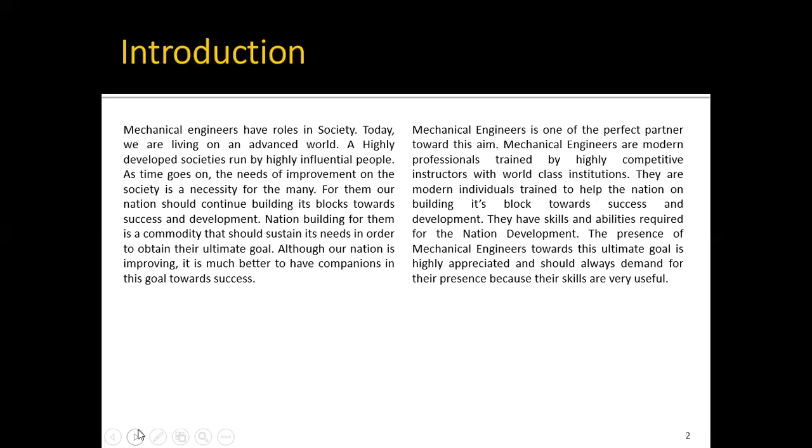Mechanical engineering, a broad profession. Mechanical engineering covers heat and energy. Mechanical engineering covers transportation, automotive. Letter C, mechanical engineering covers machines. D, mechanical engineering covers mechanical designing. E, mechanical engineering covers main industrial plant manufacturing.

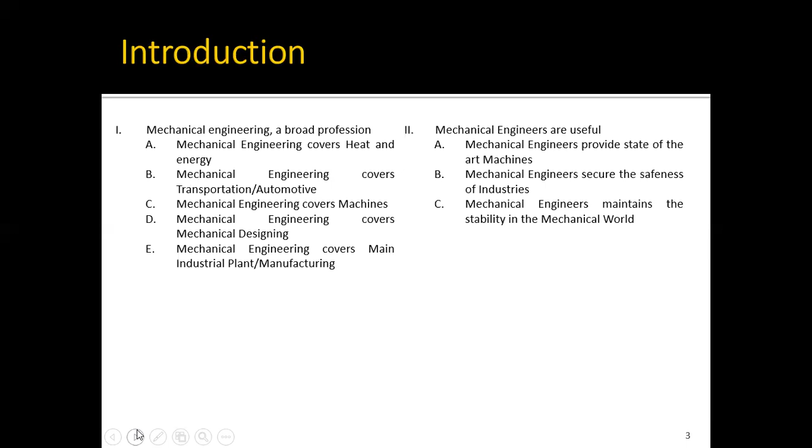Then, mechanical engineers are useful. A, mechanical engineers provide state-of-the-art machines. B, mechanical engineers secure the safeness of industries. C, mechanical engineers maintain the stability in the mechanical world.

So, mechanical engineering, a broad profession. Mechanical engineers are professionals who graduated with a degree of Bachelor of Science in Mechanical Engineering and passed the licensure examination organized by the Professional Regulation Commission of a certain nation.

Some of it is very useful and necessary in improving the level of development of a certain nation. Some of the factors covered by mechanical engineers are heat and energy, transportation, automotive, machines, mechanical designs, and industrial plants. These are only a few of the fields covered by mechanical engineers that can possibly help in nation building.

Okay, na doble. As you continue reading, you will be reading different fields of mechanical engineers that is required in nation building. As we continue, okay?

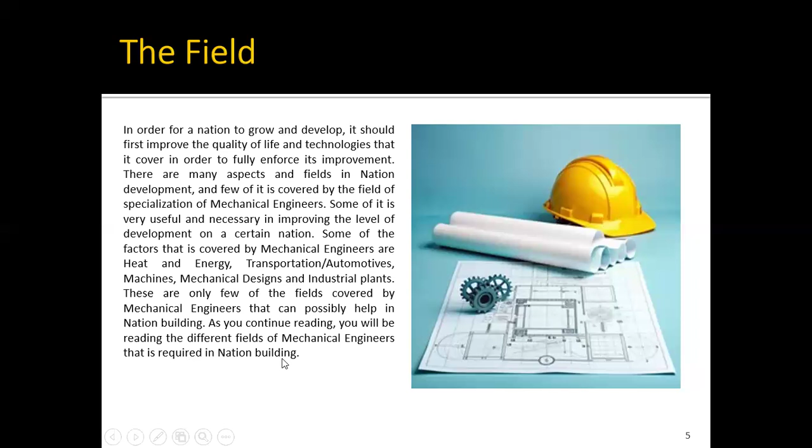For the heat and energy: we have heat and energy as the primary sources of life in the industrial world. Without it, major industries would be paralyzed, thus bringing much pain in the country, for major industries will close and many people will be jobless.

The importance of heat and energy in the nation is very necessary, even though it does not directly sustain the life of the nation. So it is really important that someone would manage and maintain the stability of heat and energy. The presence of heat and energy is surely very useful, so mechanical engineers do the job in maintaining and improving the quality of the heat and energy system in the country.

Mechanical engineers are professionally trained to design and produce machines regarding the production and different ways of producing energy. The presence of mechanical engineers in energy stability is really important, that is why many mechanical engineers are in demand in different energy production companies.

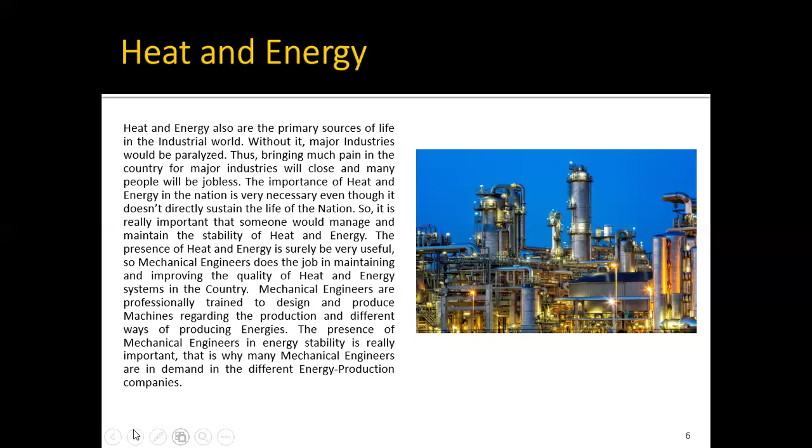For the transportation: transportation is truly helpful in our everyday lives, for it's one of the basic requirements in order to attain our individual goals. Transportation also made our lives easier. It can also save our energy and time, for it can instantly transfer certain things to a certain place without applying too much effort and time.

Transportation plays also an important role in nation building. It can be seen in different angles: it can speed up and hasten the speed of industries, and it can deliver goods to a certain place in just a short period of time. With the advantages of transportation, we can really say that it is very important in our ultimate goal of success in our country.

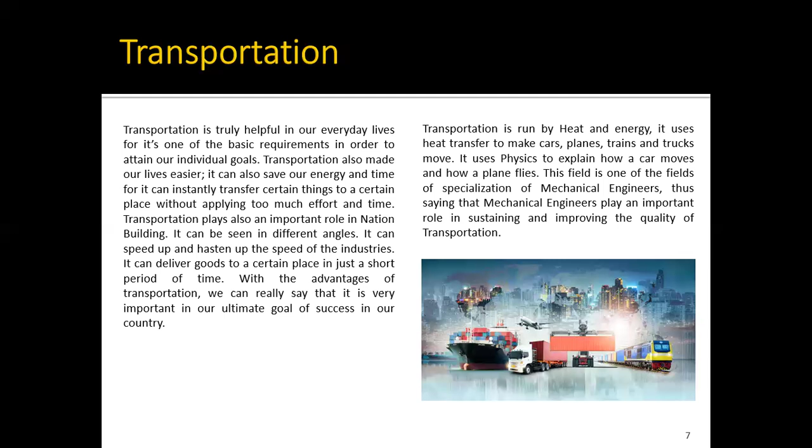Transportation is run by heat and energy. It uses heat transfer to make cars, planes, trains, and trucks move. It uses physics to explain how a car moves and how a plane flies. This field is one of the fields of specialization of mechanical engineers, thus saying that mechanical engineers play an important role in sustaining and improving the quality of transportation.

Machines, the so-called lifesaver, main function is to make our lives easier. With machines, we can do a certain job in less time. Machines are also efficient because they don't require too much effort to function. It just needs a little science, like physics, to make it move and do its job.

Machines are really important in helping the nation. With this, people can make more things and make them more useful to society, and be more effective in building blocks to attain success. Lastly, machines are also one of the fields of specialization of mechanical engineers. It is one of their specialties as engineers to design, develop, and discover more useful machines that can possibly help people in obtaining success.

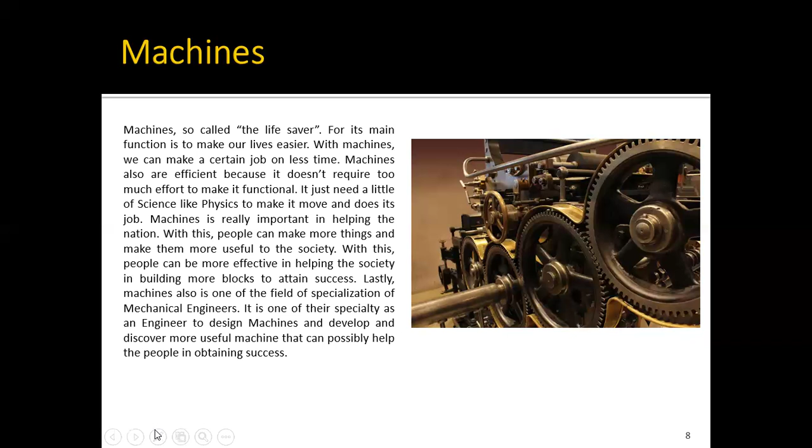Mechanical designing: most mechanical engineers work in the design and control of mechanical, electromechanical, and fluid power systems. As a mechanical engineer functioning as a design engineer, it is likely you would be involved with one or more technical specialties. For example, robotic system design, computer coordinated mechanism, expert system design, computer aided engineering, geometric design, design optimization, kinematics and dynamics of mechanism, cam design, gear design, power transmission, or design of machine elements.

Design engineers take into account a truly wide number of factors in the course of their work, such as product performance, cost, safety, manufacturability, serviceability, human factors, aesthetic appearance, durability, reliability, environmental impact, and recyclability.

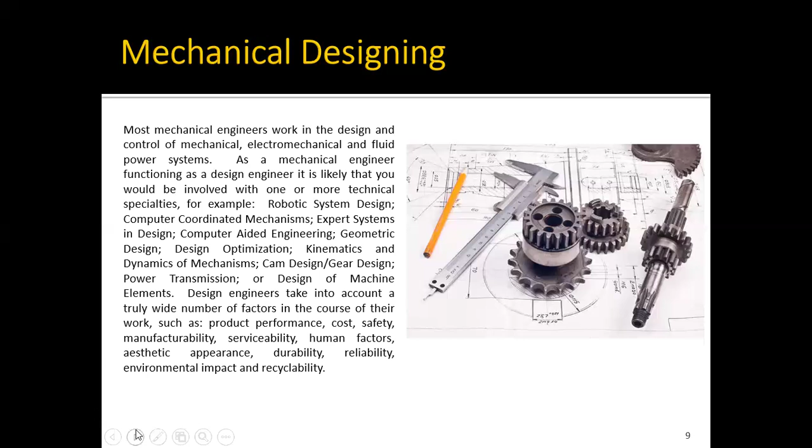Design engineering: mechanical engineers design components, entire machines, complex structures, systems, and processes. This work requires knowledge of the basic sciences, engineering principles, materials, computer techniques, manufacturing methods, and even economics. New and challenging problems come along with regularity.

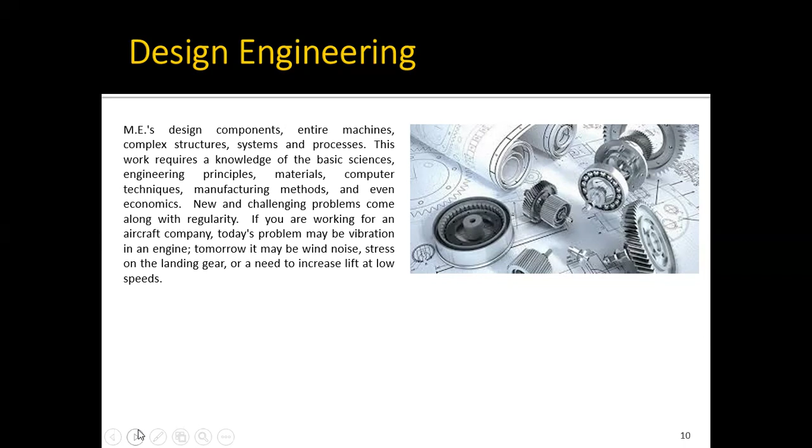If you are working for an aircraft company, today's problem may be vibration in an engine. Tomorrow it may be wind noise, stress on the landing gear, or a need to increase lift at low speed.

Next is main industrial plant manufacturing. In contemporary manufacturing companies, mechanical engineers play a key role in the realization of products, working closely with other engineers and specialists in corporate management, finance, marketing, and packaging. The aim is to design products, select materials and processes, and convert them to finished products. They design and manufacture machine tools, literally the machines that make machines, and design entire manufacturing processes aided by the latest technologies in automation and robotics.

Finally, the finished products are transported in equipment designed by mechanical engineers. This is the largest area of employment for mechanical engineers, especially when the process and textile industries are included. A finished product requires the right material, a viable plant and equipment, and a manufacturing system. This all comes within the purview of mechanical, manufacturing, and industrial engineers.

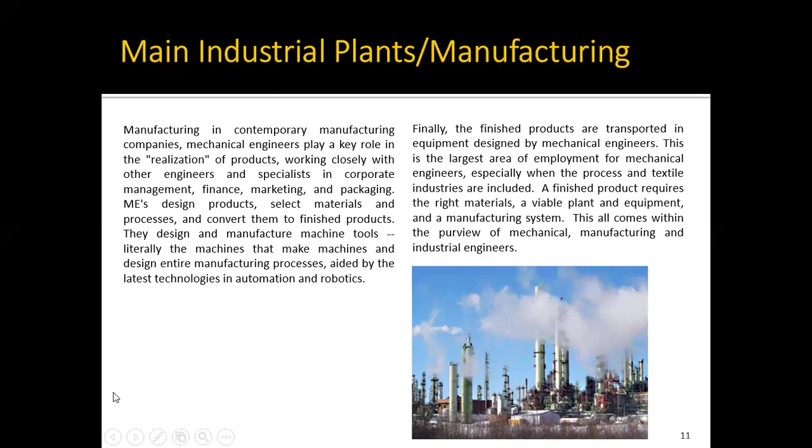Manufacturing engineer: about half of MEs work in companies that manufacture something, such as consumer goods, transportation, or industrial equipment. Another 16% work in the process industries, like petrochemical or pharmaceutical. The challenges are as diverse as the products, from miniature devices used by surgeons to disc drives or massive pieces of industrial equipment. This work calls for a knowledge of materials, manufacturing processes, thermal processes, controls, electronics, and, as in all of engineering, teamwork skill.

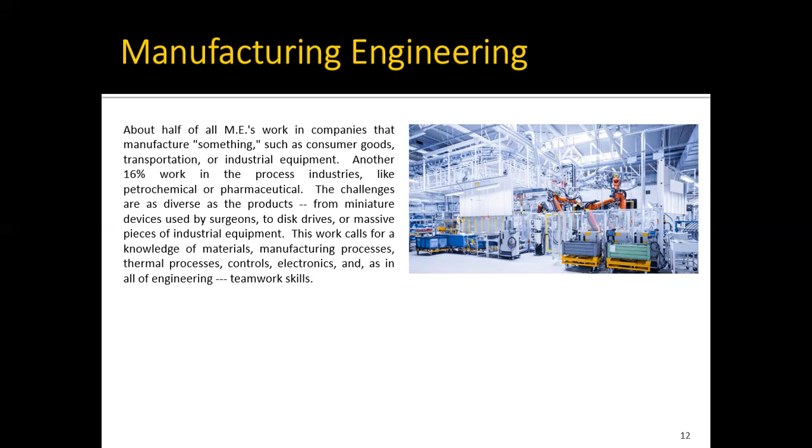Materials handling and engineering: materials must be delivered at the right time, place, and in the right form. A challenge with costly, exotic, and sometimes hazardous materials used in some industries. Some mechanical engineers specialize in material transportation, handling equipment and procedures, hazard control technologies, and in the training of employees who work with these materials.

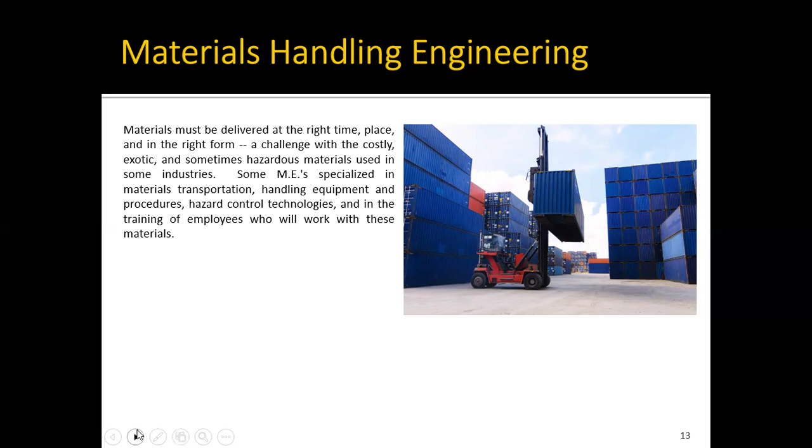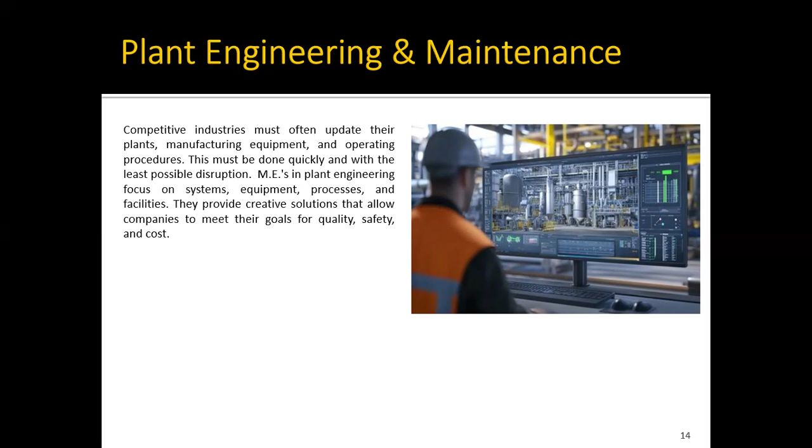Plant engineering and maintenance. Competitive industries must often update their plants, manufacturing equipment, and operating procedures. This must be done quickly and with the least possible disruption. Mechanical engineers in plant engineering focus on systems, equipment, processes, and facilities. They provide creative solutions that allow companies to meet their goals for quality, safety, and cost.

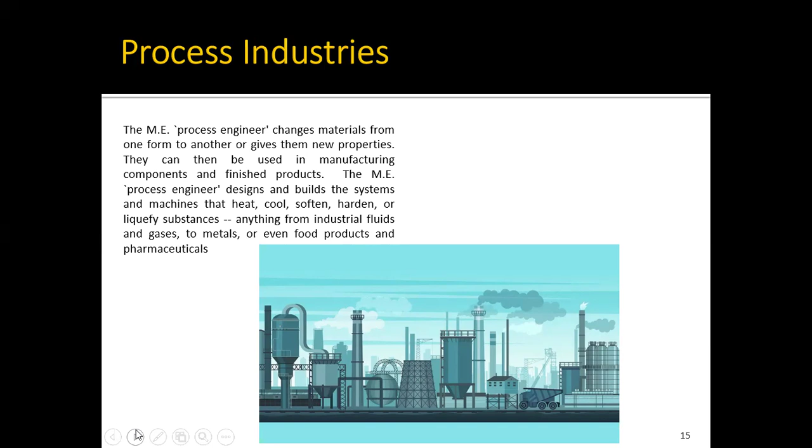Process industries: the mechanical engineer process engineer changes material from one form to another or gives them new properties. They can then be used in manufacturing components and finished products. The process engineer designs and builds systems and machines that heat, cool, soften, harden, or liquefy substances, anything from industrial fluids and gases to metals or even food products and pharmaceuticals.

Textile industries: textile manufacturing is a global industry that depends on automated equipment to prepare and handle fiber, weave or knit fabrics, manufacture finished apparel, and handle finished products. Multinational textile industries turn to mechanical engineers for expertise in plant design and construction, equipment installation, programming and control techniques, operations, and maintenance.

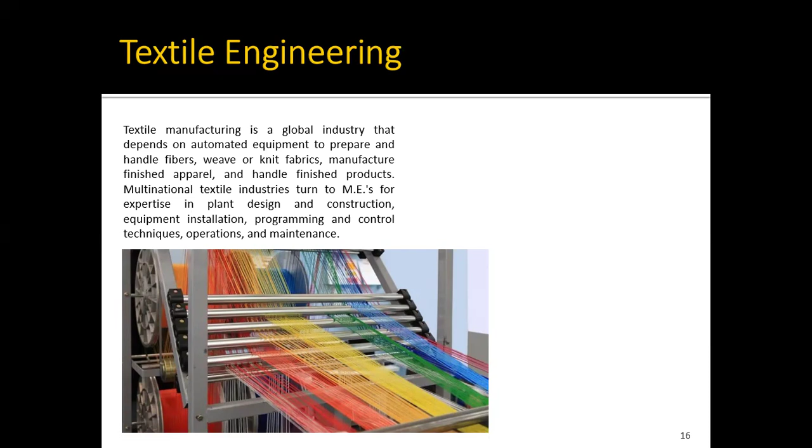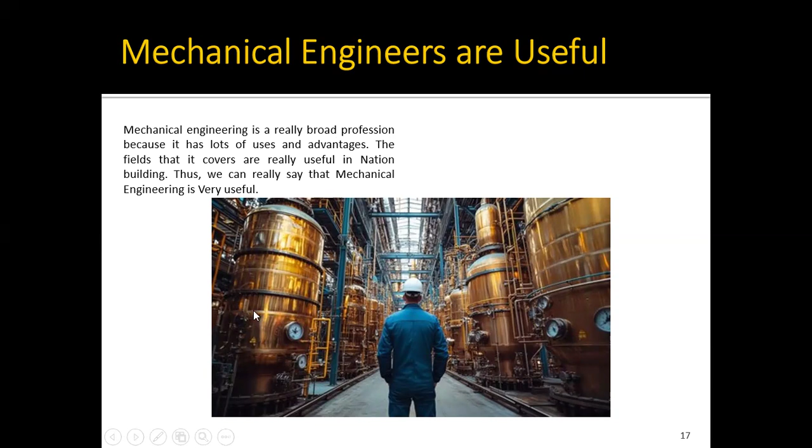Mechanical engineers are useful. Mechanical engineering is a really broad profession because it has lots of uses and advantages. The fields that it covers are really useful in nation building. Thus, we can really say that mechanical engineering is very useful. Okay, so this is the second topic.